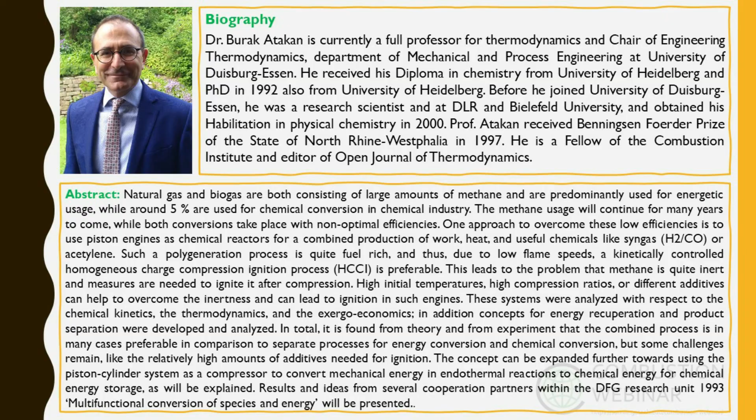And it's not only about my own work, but also about the work of our DFG research unit. I will introduce the work of the colleagues as we come to their work. Let's start with a few things you already know, I assume.

I think we all know that we have some problems with fossil fuels: they are rare, and they lead to carbon dioxide emissions, and we have problems with climate change. We'd like to reduce these carbon dioxide emissions. Due to this, not only in Germany but worldwide, we are going towards solar and wind energy, with the well-known problems that they are not aligned to the demand. Due to this, flexible energy conversion is getting more and more important. At the same time, we have quite some demand for energy storage, mainly with high energy density.

If you regard a slide where you look at the time you can store energy and the power you can get out, you would end up generally with chemical compounds if you want to store energy, like synthetic fuels, biomass, hydrogen, hydrocarbons, ammonia, but also hydroelectric. On the other side, it seems quite clear that natural gas will be used for quite a while, at least in the midterm, according to the German academies. They say we will continue using it until the carbon dioxide reduction gets higher than approximately 80%.

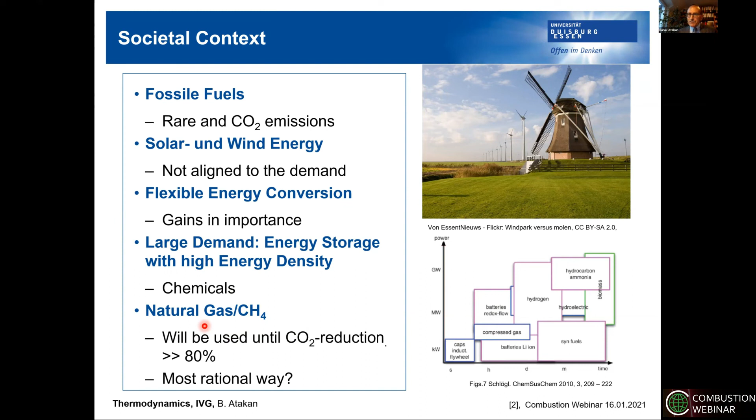Due to this, we started thinking together with several colleagues from thermodynamics, mainly thermodynamics professors. We were sitting together thinking, okay, what kind of solutions could we find, for example, to help in the energy transition? We're thinking about the usage of natural gas. Can we do this perhaps in a more rational way?

One of the things, if you regard methane usage or natural gas usage nowadays, is that around 95% is used for energy conversion, while the remaining 5% is used in chemical industry, generally first to produce syngas. Out of syngas you can make methanol, dimethyl ethers, or end up with ethylene and then some polymers. The question is, could we have processes where we produce both those together, some work output and some chemicals output, and perhaps also some heat output? Could we have some holistic conversion of species and energy?

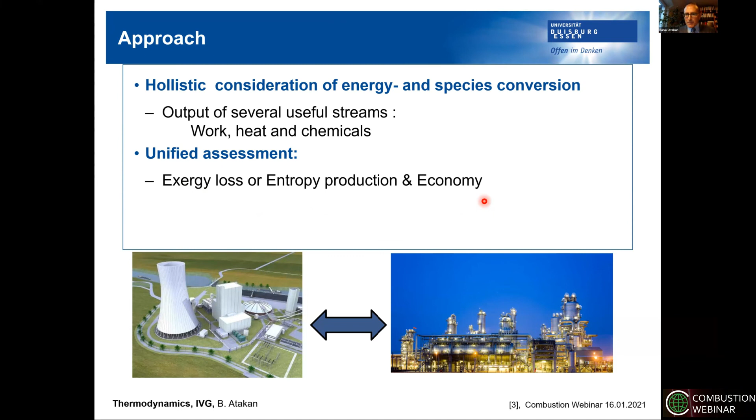Somehow we have to assess it, because the main question is also, is it really better than two separate processes? For this, coming from thermodynamics, one of the things is we can look for entropy production, try to reduce it as far as possible, or in other words, reduce the exergy losses. On the other side, we could also look for some economic assessment: will the prices perhaps be lower than in two separate processes? Since we're coming from combustion, first of all, let's look at methane conversion.

If we start reducing the amount of oxygen added, we can, for example, go to an equivalence ratio of 2, so the amount of oxygen is only half as much as you would need for stoichiometric combustion. Then you would end up with synthesis gas and some water. But what's more important at the moment is you also have some negative Gibbs energy, which is quite high. In principle, you could do some partial oxidation, producing syngas, and at the same time also have some work output. This is generally not used—you can call it wasted.

Similarly, you can continue reducing the oxygen further towards an equivalence ratio of 4, and you can get even more hydrogen out. Surely the possibility to transfer some work will be reduced, but it's not zero, and it may be reasonable to have some work output. So this would be a polygeneration process with at least 2 or even 3 products, if we also have some heat which is transferred.

If you go further, you can leave out the oxygen and think about some endergonic and endothermal reactions, for example towards acetylene and hydrogen, or benzene and hydrogen. For this you would have to add some work, and this would be a typical process where one could think about storing energy. You could add 156 kilojoules, if it were reversible, to produce acetylene and hydrogen, either use it directly here in chemical industry, or if you don't want to use it there, at least you could burn it again and you would have a higher heating value.

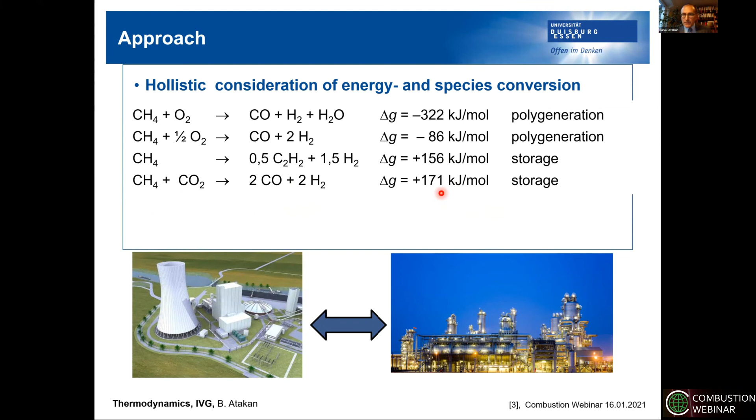This is one process mainly investigated by Olaf Deutschmann and his colleagues. We could also go for dry reforming, where we convert carbon dioxide with methane towards syngas. Again we could store energy because the Gibbs energy is highly positive, and again we could think about whether we could perform it with what we know from combustion.

With respect to exergy, I always include this slide because at least the chemists in the combustion community normally don't know much about it. Exergy is just the available part of the energy, and it depends on the actual state of a system and on the environment. It's mainly how much energy is convertible into any other form of energy if you bring it into equilibrium reversibly with the environment. Exergy can be lost or destructed due to irreversible reactions, due to heat losses, or due to mixing. It can easily be calculated from thermodynamics, just looking at the irreversible entropy production and the temperature of the surrounding.

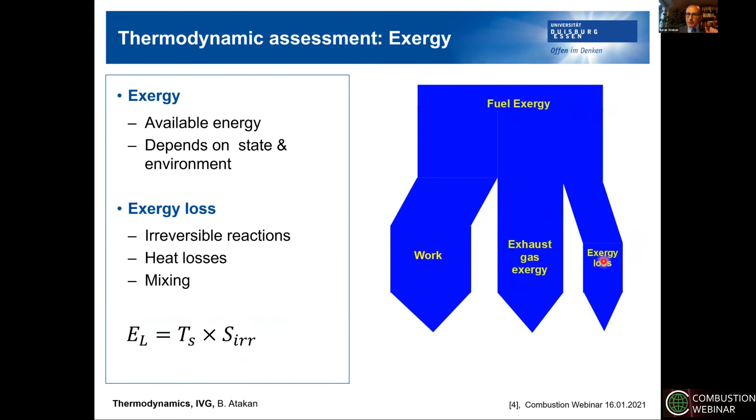The main idea is that we have lots of available energy in our fuel or in our precursor, and we want to transfer as much as possible to work, or to the exergy of our useful products, which would normally be in the exhaust gases. We want to reduce the exergy losses as far as possible.

In principle, these kinds of polygeneration processes were already investigated by several groups, but generally, as shown here from one paper, they are combining 2 well-known processes. For example, here some iron production process is used where you add some iron ore and coal and end up with some hot iron. But since you're producing carbon monoxide, you can use this again, for example in a combined cycle, and produce heat and electricity together with the metal. You will also have to add some natural gas in addition to the carbon monoxide, while the processes remain unchanged.

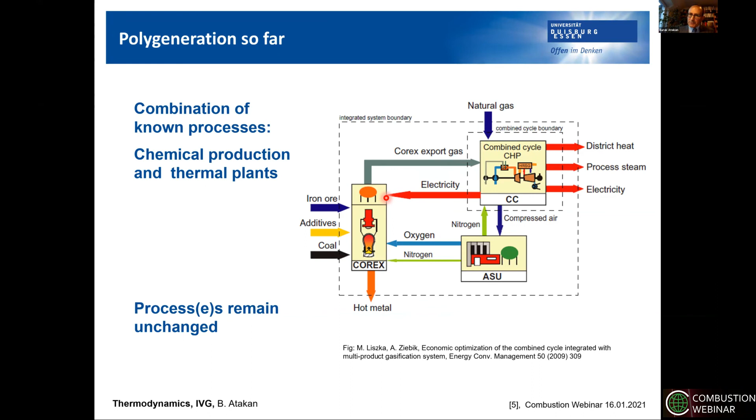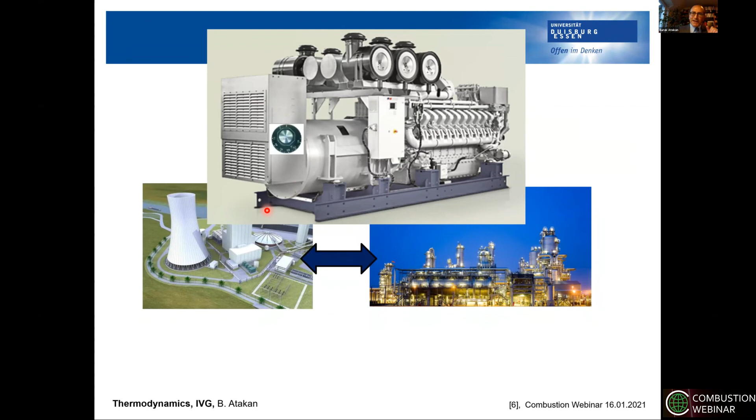In our case, we want to look into the process and have one single process which is modified, and we want to use them for polygeneration. Since we're coming from combustion, we ended up putting those 2 things together into a single engine.

Generally, you will be asking yourself, why an engine? My first paper about this topic was about gas turbines, but they are quite expensive, and nobody wanted to give me his gas turbine for doing experiments under very fuel-rich conditions. Instead, with engines, we know at least that they are industrially approved and relatively cheap.

If you have the HCCI process, meaning you have a homogeneous charge, so a pre-mixed mixture, and you ignite it due to compression, you have a mainly kinetically controlled process. Generally there are also always some questions why HCCI - I'll come back to that in a minute. The other thing is we don't only have the compression where we heat it up, but we also have the expansion directly after. If the product would tend to react further, you can stop them due to cooling in the expansion. That's again, at least sometimes, quite helpful.

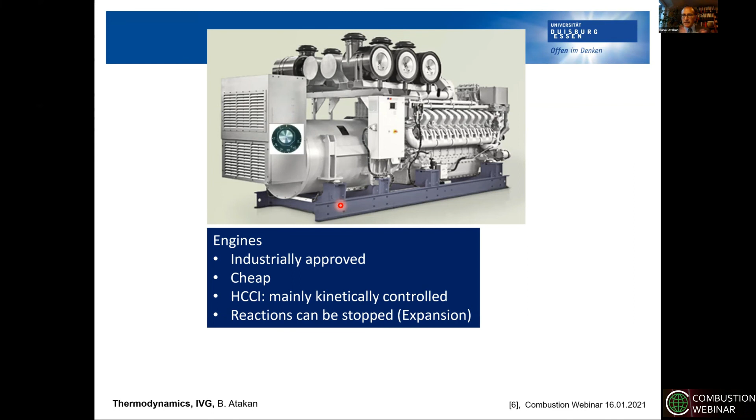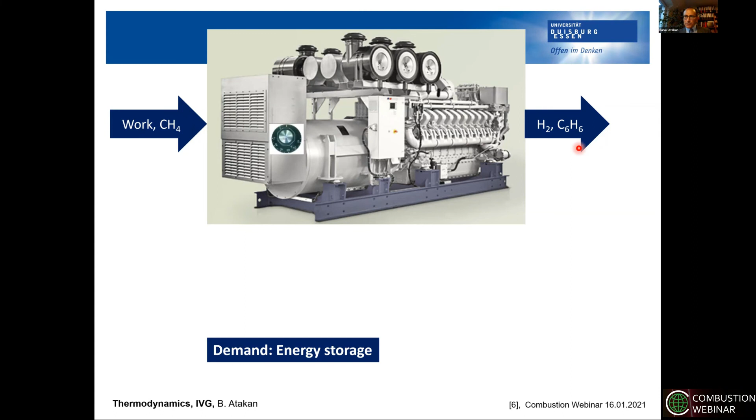The idea is for flexible energy conversion we may have such a knob, and we can choose: for example, if the demand is energy storage, we could add work and methane or natural gas and end up with hydrogen, benzene, acetylene, and whatever comes out. Or if the demand is changing, we would need electrical energy and chemicals, so we'd add oxygen instead of work and end up with work output and syngas. But we have problems with natural gas or methane because it's relatively inert.

Due to this, we often need an additive to help ignite this mixture. For example, things like DME, dimethyl ether, are used, which isn't really wanted because you're producing dimethyl ether out of syngas, so you don't want to add too much of it. Recently, we're also looking at things like ozone, which can help with ignition.

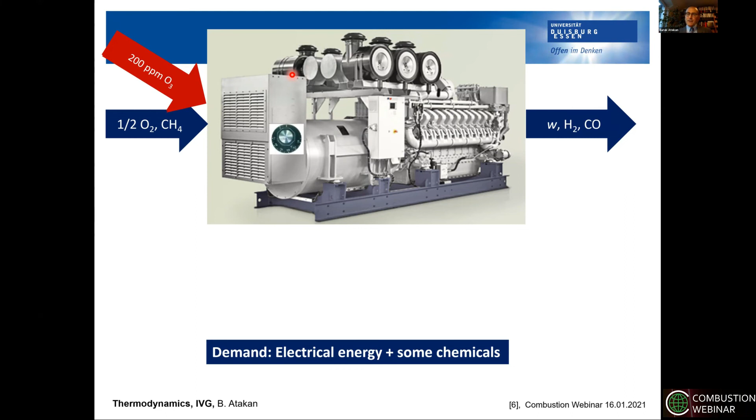Our approach is to use engines directly for the conversion of species and energy, using the knowledge of the combustion community. We want to go along high temperature paths, so we won't be able to produce things that are very unstable at high temperatures. But we also want to use all the mechanisms developed within the combustion community to reduce the amount of pollutants.

Our aim is not to reduce pollutants — something like carbon monoxide would normally be a pollutant. Instead, we want to maximize them using these mechanisms and other techniques learned in combustion. So we want to go away from pollutants towards useful chemicals and investigate the fundamentals of such processes.

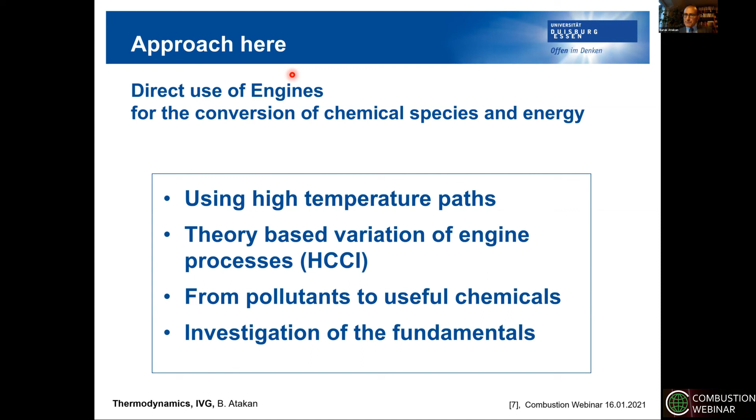With respect to the engine process, I often get the question: why don't you want to use spark ignition? Why do you want to use HCCI processes? Because many of you know that HCCI processes are difficult to control, mainly in the lean regime.

But you should keep in mind that we generally have to go to quite fuel-rich conditions. And if you want to ignite with spark ignition, the flame propagation depends on the turbulent flame speed, which in turn depends on the laminar flame speed, and this drops strongly as you go towards high equivalence ratios.

So due to this, with HCCI we think, and we've also proved, that it works better. I'll show you a few slides about that.

So in total, the HCCI process is more or less an Otto cycle. If we start at bottom dead center, we have the compression, then a more or less isochoric ignition, then the adiabatic expansion, and then you would have the exhausting afterwards.

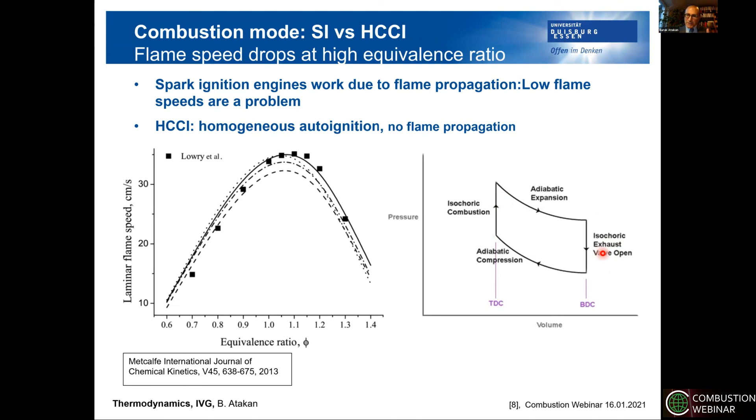And therefore, for the exhaust, we're interested in using what's coming out there at that point. Our main goals here are to answer questions such as: are high yields and high selectivities possible in engines towards synthesis gas, but perhaps also towards unsaturated or partially oxidized hydrocarbons?

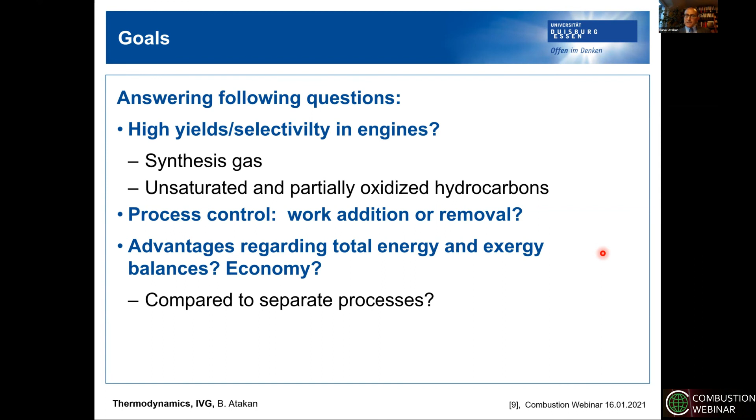Is it easily possible to control such a process so that you either add work or remove work depending on the needs? And also — perhaps the crucial question — are there any advantages compared to separate processes with respect to total energy and exergy balances, or with respect to the economy?

With respect to piston engines, one should keep in mind that it also leads to several couplings which one has to care about. First, if we just look at the energy balance, the amount of work transferred is just the amount of change in internal energy and the heat transferred.

Let's think about some adiabatic compression. Then it's clear the final temperature depends on the compression ratio and can be calculated according to this formula if Cp were constant. But here are some calculations with non-constant Cp.

What's important is if we increase the compression ratio for different mixtures — pure methane, methane with oxygen 1:1, or methane with air — you see the temperature rise isn't bad, but if you regard the ignition temperatures, around 1300 K, wanting ignition in the millisecond regime, we're far from it. With oxygen it's getting better, with air even better, but keep in mind these are compression ratios of 40, while something like 20 would be more realistic.

While if we start heating the mixture first, a little bit towards 450 K, things look much better, but not perfectly good. So there's something to be done about that, to really end up with some ignition.

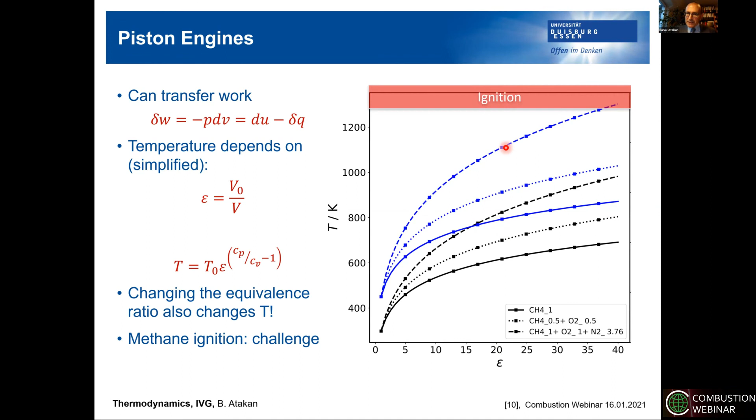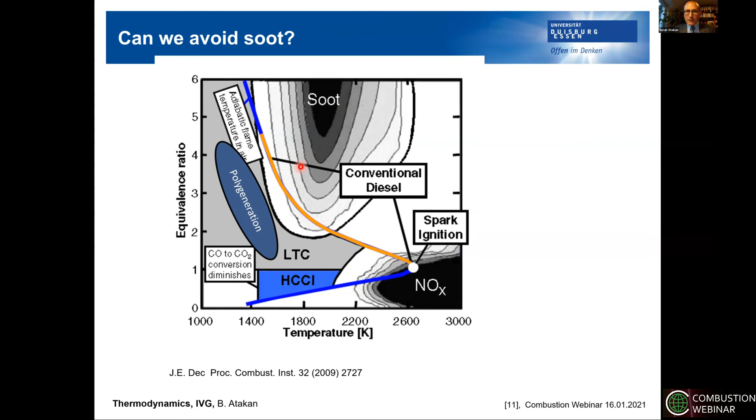And so we went through a procedure. We are running this project now for 8 years with 8 projects. First of all, we have some a priori evaluation: is the thermodynamics favorable in principle? Is the predicted kinetics fast enough to have such a process in the engine, using non-validated mechanisms? And what could be probably favorable conditions, before we start doing experiments with respect to the kinetics, using shock tubes, rapid compression machines, or flow reactors, and later on also in engines.

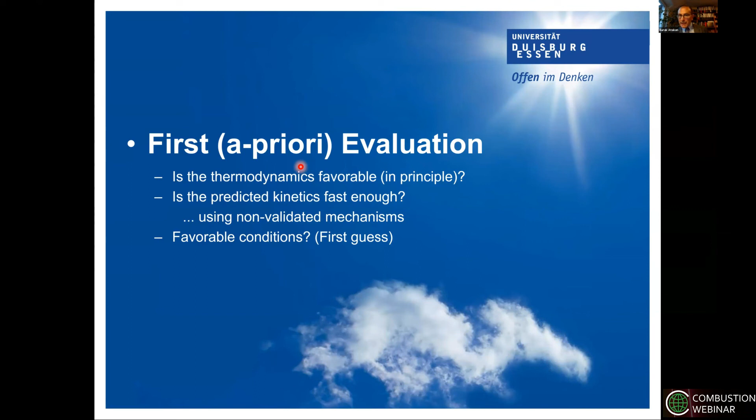A good idea is to start with something relatively simple, and a single zone model with detailed kinetics is a good starting point, including some heat transfer using the Woschni equation. We use a reaction mechanism which is already established; you will find the reference here. We start with some initial conditions, and then go along the crank angles or along the changes in volume, calculating with the kinetics and thermodynamics the changes in temperature, pressure, and composition. We do this time step by time step, as many of you will know.

And then at a certain point, we get ignition, but we are mainly interested first of all in integration of the work, but we want to know also what's coming out at the end with respect to the product gases, with respect to Exergy and the work output.

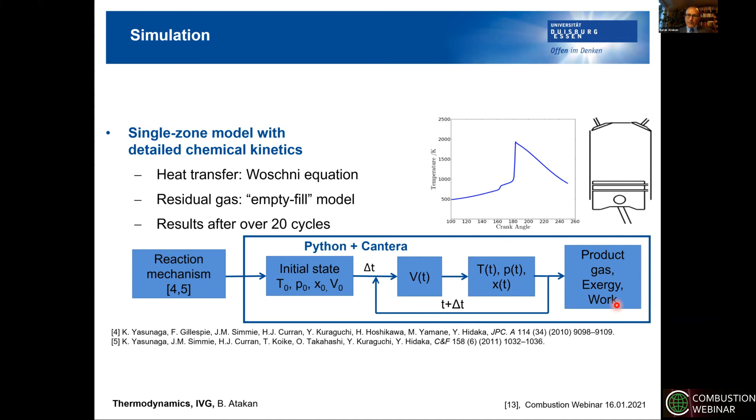If we have just a typical cycle, this was calculated by Dominik Schröder, who changed his name to Freund now, and by Robert Hegner, at equivalence ratios of 2, a relatively low engine speed, compression ratio of 18, and 428 K. It's already the 10th cycle, because it always helps to have some residual gas at higher temperatures for the ignition in the next cycle.

And after a while, you will end up with a steady state process. If you now regard the products here after ignition, you see that we end up with reasonable amounts of hydrogen, something like 18%, or carbon monoxide, something around 13–14%, in the exhaust gases. Ethylene or acetylene are only produced around the ignition under these conditions, but afterwards they are reduced near to zero.

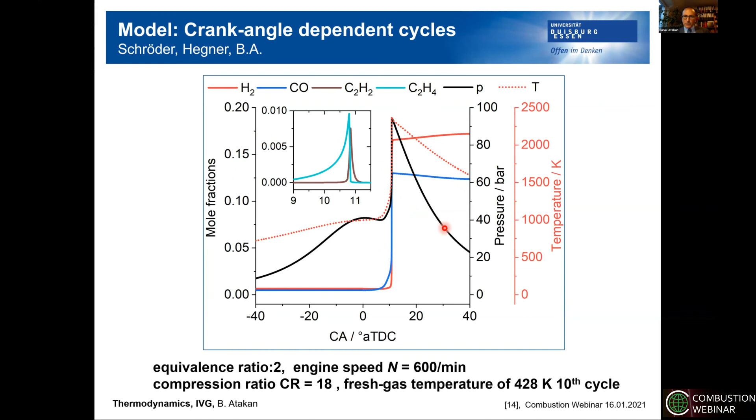Now, the main point for the initial investigation was also how can we reduce the intake temperatures, because our experimentalists did not want to have higher temperatures than around 150–160 centigrade approximately. If you look for an engine with a compression ratio of 16.5 and a speed of 3,000 per minute, having neat methane, you see that we'll need quite high intake temperatures for ignition if we go for high equivalence ratios. You can reduce it, for example, by increasing the compression ratio. That helps a lot. What also helps is reducing the engine speed, or what's perhaps best, mainly under very fuel-rich conditions, is adding an additive like dimethyl ether, something like 5 up to 10% seemed to be reasonable.

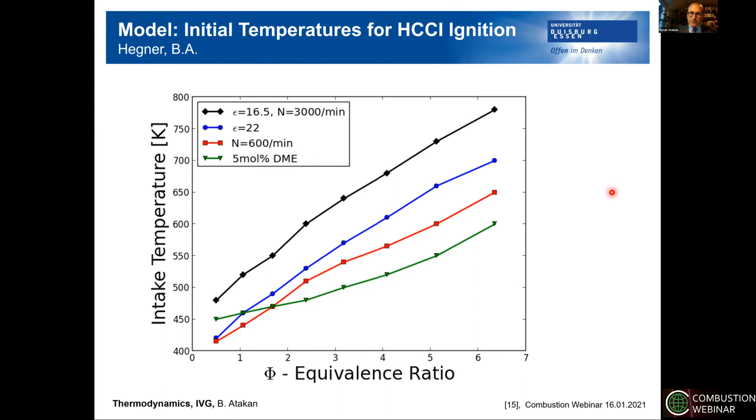And this was also one approach we were using afterwards. What is predicted, at least from the modeling, what should be coming out? At equivalence ratios around 2 to 2.5, we should have lots of hydrogen coming out, lots of carbon monoxide coming out, so synthesis gas. We can also change the ratio between both, which is sometimes quite important. While if you want to go for acetylene or ethylene production, you will have to go to very fuel-rich conditions. And surely the amount is not too high, but you should also keep in mind that we are doing all these things with air as the oxidant, so we have relatively high amounts of nitrogen in the mixture.

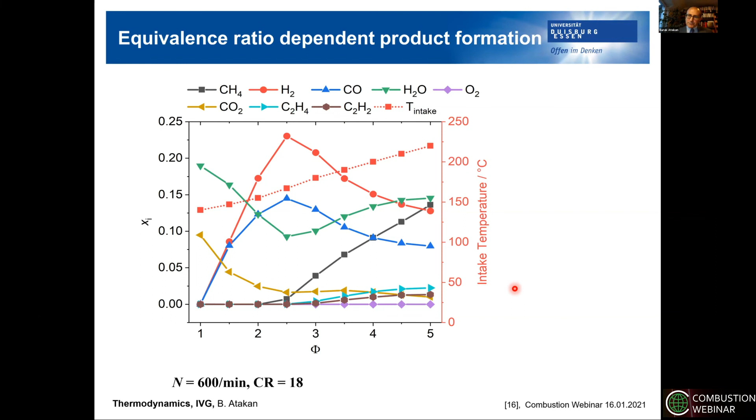But since it's quite tedious to do all these by some guessing what may be good conditions, we have colleagues, mainly Olaf Deutschmann and Hendrik Gossler, who do this with mathematical optimization. In these calculations, they went for an optimization of ethylene. For each temperature, they had one optimization restricting the amount of DME and the engine speed to some maximum values. As you see here, if the intake temperature is not too high, you would have to add around 10% dimethyl ether — this was their limit. While at the higher temperatures, you would go for higher engine speeds.

What's perhaps most interesting is how much ethylene is predicted, and you see something between 15 and more than 20% seems to be possible. The equivalence ratios, which are also optimized, would then be somewhere between 3 and 4, which is a dangerous regime with respect to soot formation, to be honest.

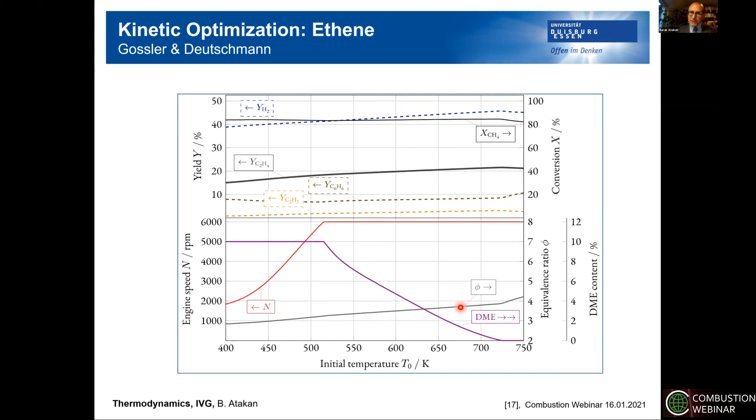Okay, this is about the first evaluation. The next thing is we should validate these things in experiments, because most of the models we're using initially were not really validated too much for these kind of conditions.

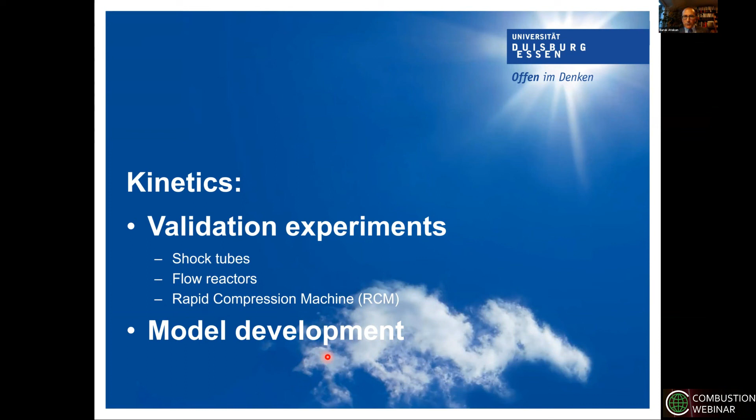So we have different experiments using shock tubes in the group of Mustafa Fikri and Christoph Schulz. We have flow reactors, mainly Tina Kasper is working on this together with myself. And we have a rapid compression machine, which is more or less the first step towards the engine, done by Robert Schiesel and Ulrich Maas. At the end, we also developed a relatively small model, again, in the group of Ulrich Maas.

If you look for a few exemplary results from the shock tube, where you can have relatively high temperatures at small time scales, but also relatively high pressures, you see that the ignition delay times can be shifted from neat methane, this curve here, by adding different additives. Here you see DMM, dimethyl ether, diethyl ether, or N-heptane as additives.

And it doesn't really matter which of those additives you're using. If you want to end up, let's say, with 1 millisecond of ignition delay time, or 1 or 2 milliseconds, then you have a shift of around 150 to 200 K, with nearly any of those additives added at 5 to 2%.

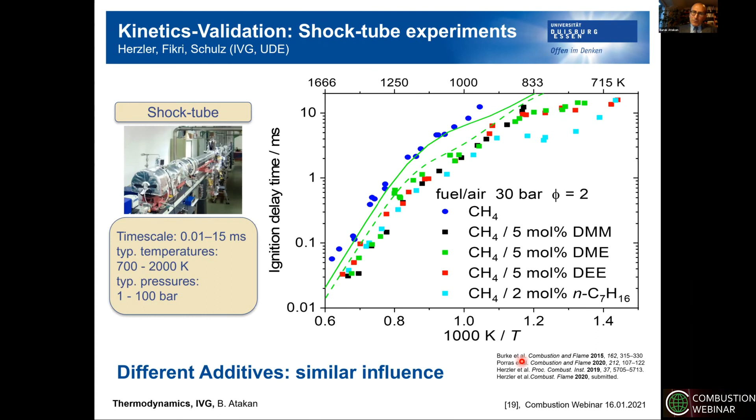With respect to the mechanisms, I should admit that this was the Polymec mechanism coming from Ulrich Maas and Silvia Porras, which is at that point slightly worse for this calculation for DME, compared to the Burke mechanism. But nevertheless, at least additives seem to be helpful.

Another question we got quite often, or we get quite often, is in natural gas there is also ethane and propane. Couldn't this help already? So perhaps we don't need any other additive.

Some of the experiments were done by Dennis Kaczmarek together with Tina Kasper in a simple plug flow reactor. Here you're mainly seeing the insulation. In the middle of it, there's just a quartz tube. And at the end, we normally have some mass spectrometer or some gas chromatograph for the analysis.

The time scales are now much larger, something like 10 seconds. The temperatures are lower. Now we can go up to 1400 K, but these are in the old reactor with 970 K, and pressures could go up to 20 bar here.

Since we are only looking at the final products, the main question is at which temperature is methane really converted? For neat methane, it's somewhere around 800 K, while if you have ethane and propane added in total by 10%, you see that it helps a little bit, but not too much.

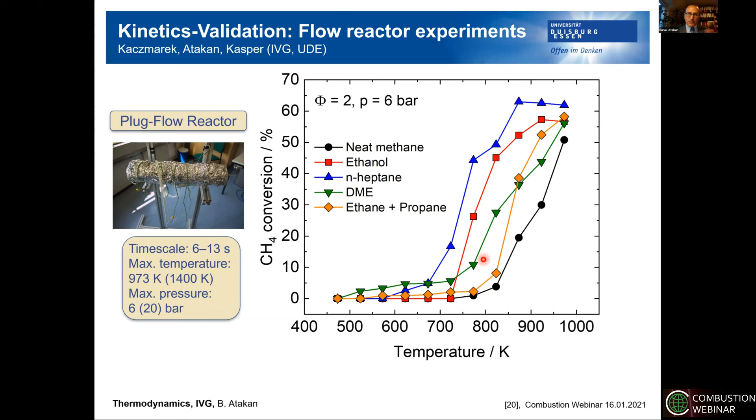While, for example, for N-heptane, we can even start at around 700 K, and for dimethyl ether, it's quite similar, starting much earlier. So again, we are going towards such additives like dimethyl ether or N-heptane.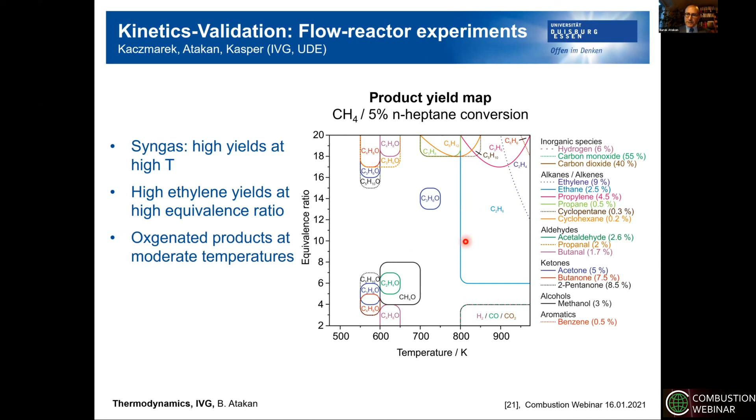Another question we also get quite often is, can we really end up with reasonable amounts of ethylene also in some engine-like process? And we looked for this in a rapid compression machine. This was mainly done by Mark Werler, Robert Schießl, and Ulrich Maas.

Here you see experiments for quite different equivalence ratios between 1 and 15. For example, for ethylene, you see that at least at equivalence ratios of 6 to 7, you can end up in a non-optimized process with around 2% yield of ethylene.

So at least for a non-optimized system, it doesn't look too bad, but under some of these conditions, we always have the danger of soot formation.

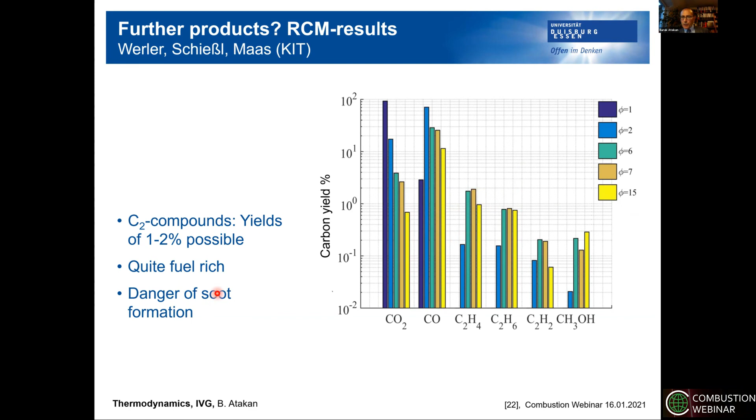Okay, then the next step is going towards engine experiments, because in real engines, several things are more difficult than in our nice kinetics experiments. This is mainly done by Sebastian Kaiser and Kai Banke, and earlier by Sebastian Wiemann.

It's an engine with a quite simple scheme here. I won't go through all the details, but we have the pressure measurement inside. We can go for intake temperatures of 150 to 160 centigrade. Initially, the compression ratio was restricted to 10, now we can go for 20. Most of the experiments were done at relatively low engine speed, and the displacement volume is 0.3 liter. At the end, we have some exhaust gas analyzer and some smoke meter.

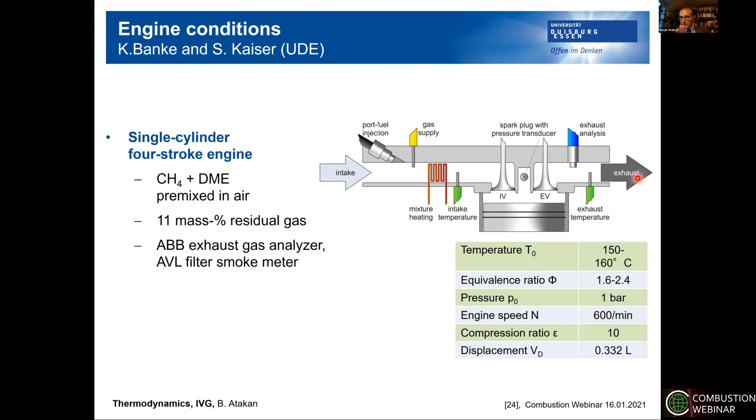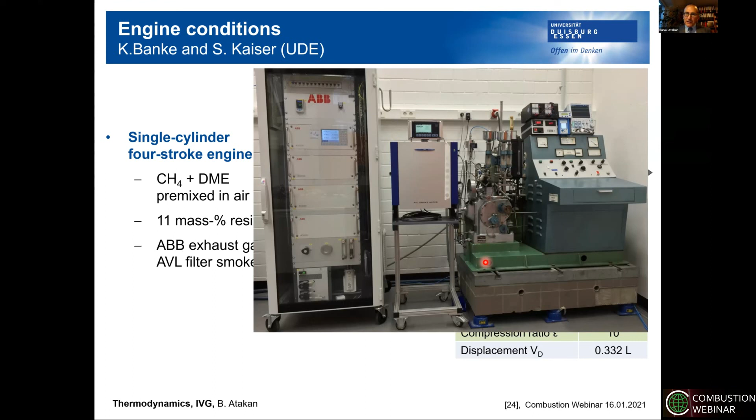You should also keep in mind that the laboratory equipment has to be changed a little bit, because our exhaust gases, when mixed with air, are ignitable again. So one has to take care about that. If you look at the engine, it doesn't look too modern, but nevertheless it's quite robust. Here's also the gas analytics. This was the engine used most of the time, called a BASF octane engine.

In the very first experiments, we started with spark ignition because we already had the setup for it, and we also did the one-zone modeling. You see all the co-authors at the top. The experiments were done by Kai Banke in the group of Sebastian Kaiser. What you see here is we are comparing the experimental results with the modeling.

The main parameter is the equivalence ratio. If equivalence ratio is 1, we end up with carbon dioxide mainly, while hydrogen and carbon monoxide are mainly produced if you go to higher equivalence ratios. But starting at an equivalence ratio of 1.5, we get more and more misfires, while the model doesn't care about that. We model the spark by some OH addition at top dead center, while in the engine you see that you don't get much output on average.

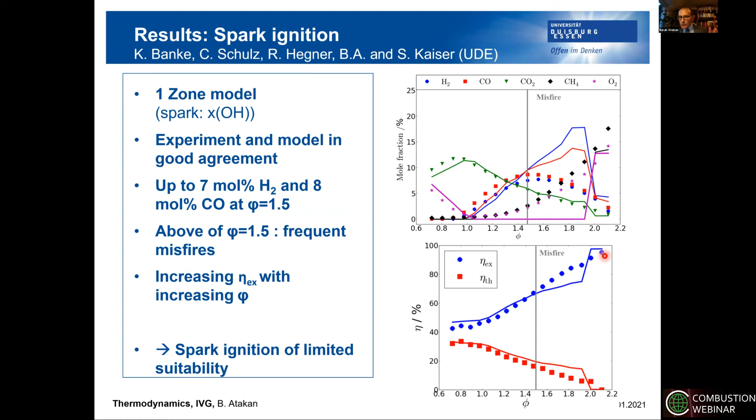If you now look at the efficiencies, the exergetic efficiency and the thermal efficiency, surely thermal efficiency drops because the more fuel rich you get, the less you convert towards carbon dioxide. While if you look at the exergetic efficiency, you have lots of the exergy in the products together with the work output, so at that point we can increase the efficiency from around 40% to more than 60%. But these points are misleading, because if you don't have ignition, you end up doing nothing. If you conserve your methane, surely you don't produce any entropy, but this isn't really what you want. So even if you conserve all the exergy in your fuel, this may be misleading at that point.

Then the colleagues did lots of nice experiments, now not only in SI mode but also in HCCI mode with dimethyl ether or diethyl ether added. Here you see the regime of equivalence ratios from 0.5 going up to around 12. There are lots of data, I won't go through all of them, but what you see is with HCCI we can easily end up with syngas, for example at equivalence ratios around 2 with quite high amounts.

But we also have to care about soot. You see the amount of soot is also increasing here, so you have to find a compromise if you don't want too much sooting. The next problem we also have to care about - I'll come back to this in the next slide - is that under certain conditions we have a problem with how often we get misfires. So this coefficient of variance is one parameter which should not be too high.

Regarding the exergetic efficiencies, you see that we can go up to 80% here with DME, and even slightly higher with diethyl ether. The nice thing about these diethyl ether experiments, which are at very high equivalence ratios, is that the amount of soot is reduced quite strongly. So if you go for very high equivalence ratios, this helps.

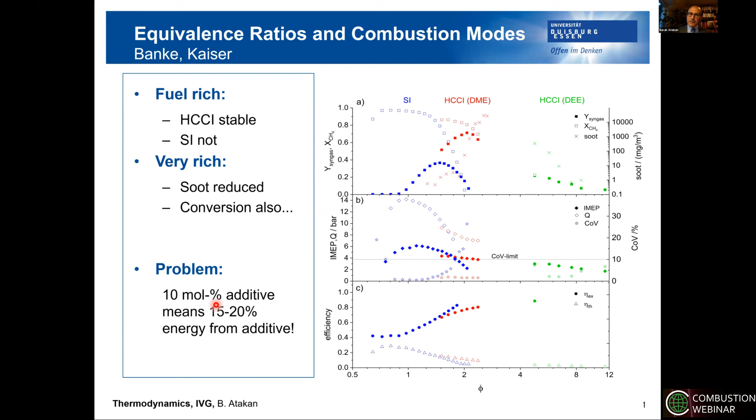One part of our research is now going in the direction to avoid at least these ethers as additives. But let's also go through the other things we learn from doing such engine experiments.

For example, Kai Banke always uses these kinds of experiments where he adds more and more dimethyl ether while holding all the other gas flows constant, here for an equivalence ratio of 1.75. What he sees initially is the coefficient of variance, shown on the right-hand axis, is quite high initially, meaning you have lots of misfires.

While it's reduced in this experiment at dimethyl ether mole fractions between 9 and 10%, relative to methane, if you add further dimethyl ether towards 11%, the pressure rise rate gets quite high. This is a problem also known from lean HCCI processes. The pressure rise rate shouldn't be too high because you're in danger of destroying your engine. So in the middle we have a window where we can run this process nicely, but we should neither have too small amounts of dimethyl ether nor too high amounts, in order to have a stable process.

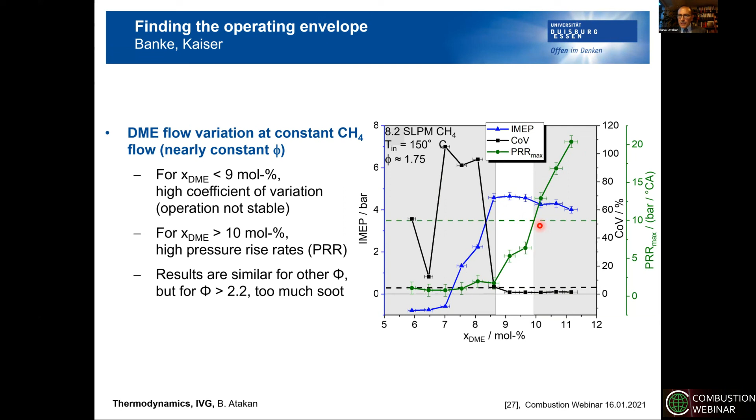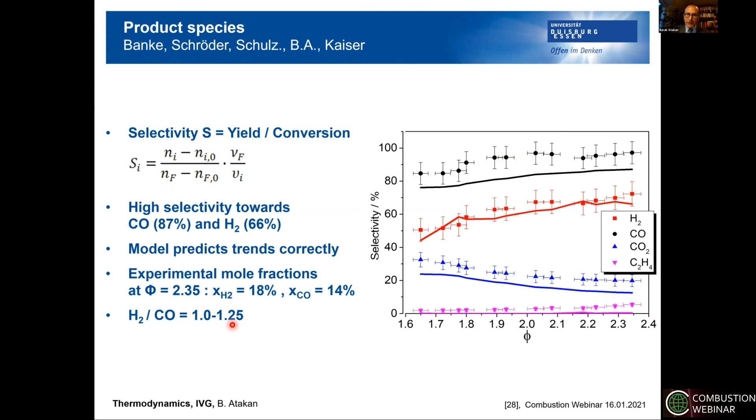If you then regard the selectivities, comparing experiment and our single zone model, we also have multi-zone model results, but these are much slower. They are in reasonably good agreement, so we can make lots of predictions also with such relatively simple models, and the amounts of hydrogen and carbon monoxide are relatively good. We can also vary the ratio of hydrogen to carbon monoxide, which is also interesting sometimes.

With respect to the exergetic efficiencies, as I already told you, we can go up to 80%, while the thermal efficiencies are not very high, around 10%. But nevertheless, around 10% of the energy is converted to work, while the remaining part is found in the chemicals or as heat.

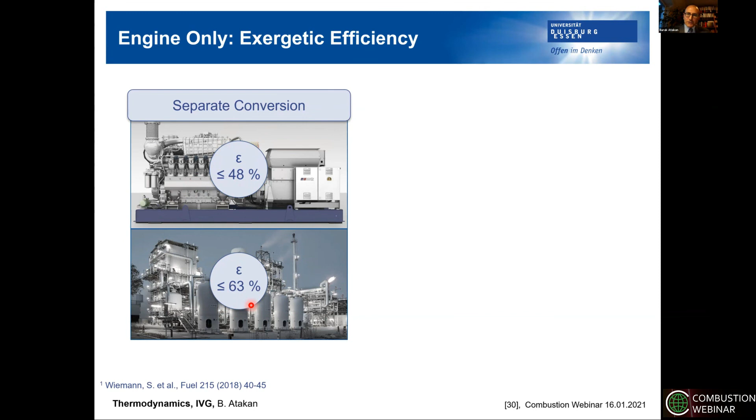So now if we compare with separate conversions, from the literature we found the best HCCI process has an exergetic efficiency of about 48%, only towards work, while the best syngas production process ends up with 63% exergetic efficiency from the literature, while what we found here is something like 80%. So it seems to be promising at least.

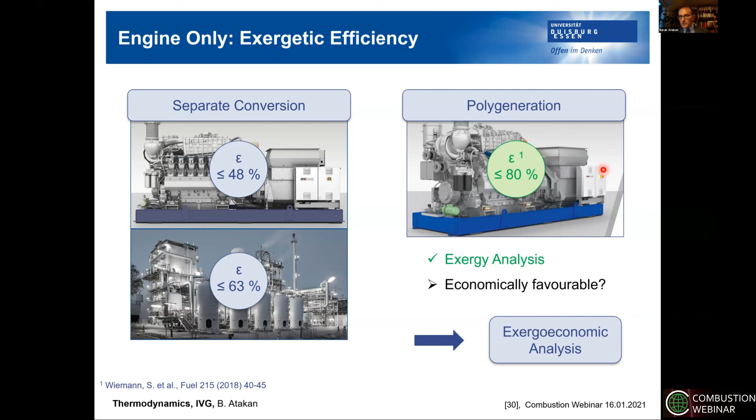But the next question is: is it also economically favorable? We are not yet finished, because here we end up with a mixture of different gases, and we also have to think about how much it costs us in terms of exergy to separate those gases. Due to this, we went for a process for hydrogen production together with work and heat, and also assessed the separation together, and then the economic assessment.

So we end up, in theory—it's only a modeling study—with a process where we start with methane and air, have our engine or single zone engine model, with a preheating stage. Then we have some exhaust gas recirculation, which is varied later on. The carbon monoxide is converted in a water gas shift reaction towards hydrogen, and then we have a membrane in our model made out of palladium, which is quite expensive. Then the hydrogen is separated, and we also need some pumps or compressors to end up with a reasonable pressure of the hydrogen.

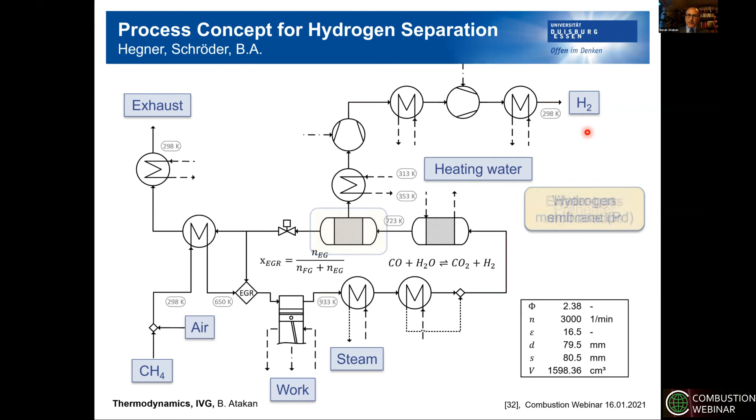If we go through such a process, we have to analyze each part with respect to the economics. So we have exergy flow rates for each compound, comparing how much cost rates are getting into a process from the fuel, how much are getting out, and what's the difference for the products.

How much do I need for the investments, for operation and maintenance? And how much does it cost us to destroy exergy or to lose exergy? For this, we have these cost rates—each exergy flow rate has to be multiplied with the cost per exergy, giving us the cost rates.

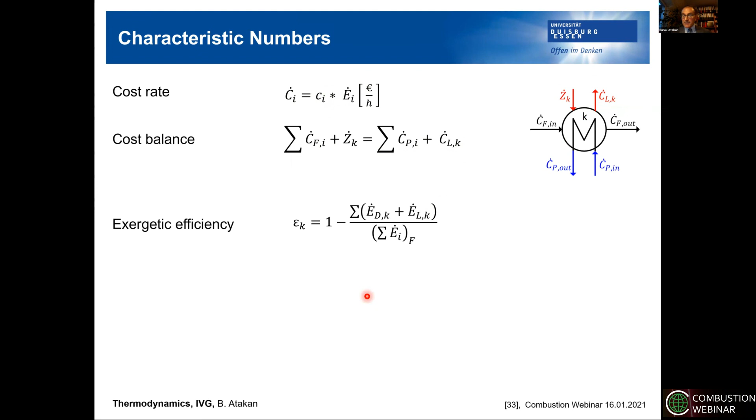Then we have a cost balance for such a system, comparing the difference in the cost of fuels and the investments with those of the products, losses, and destruction. We compare the exergetic efficiency, how much is lost compared to the exergy initially provided. And the exergo-economic factor is perhaps also quite interesting.

It compares how much the investments and investment costs contribute to the costs, and how much of the total costs result from investments versus from the destruction of exergy. So if this factor is around 1, you should look for processes which are cheaper with respect to investment. If it's near 0, you should look for thermodynamically more favorable processes.

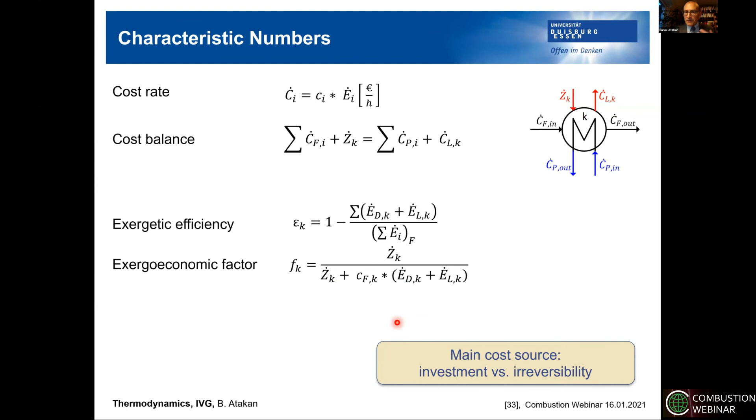I will not go through this one. So let's look for the

Product cost rates of hydrogen, but also of electricity, steam and water. What we're seeing here is if the exhaust gas recirculation ratio is not too high, then we have relatively high product cost rates for the hydrogen. Perhaps most interesting, 67 to 80% of the costs are coming from the hydrogen, meaning 30 to 20% are coming from electricity and heat. So it's worth also looking at those two while looking at the hydrogen, since 20 to 30% of the costs are coming from the other products.

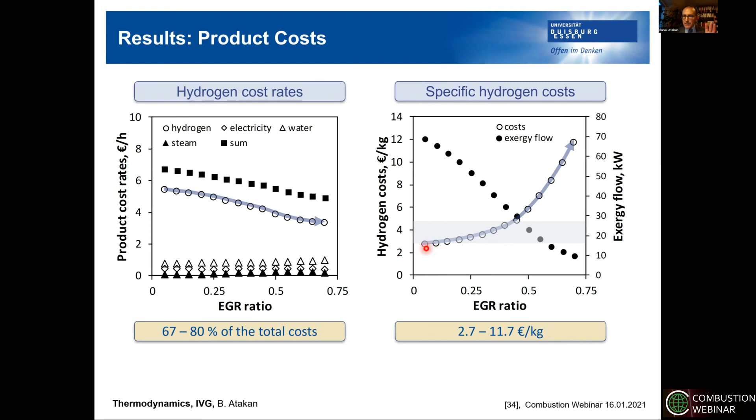If you look at the hydrogen costs per kilogram, this is our typical market price we could find, so we can compare our process here. If the exhaust gas recirculation ratio is not too high, then we are at the lower limit, and it seems quite reasonable to have such a process. So it's competitive.

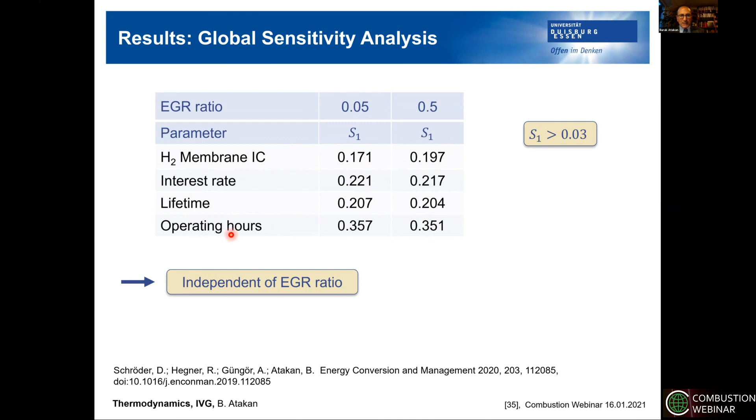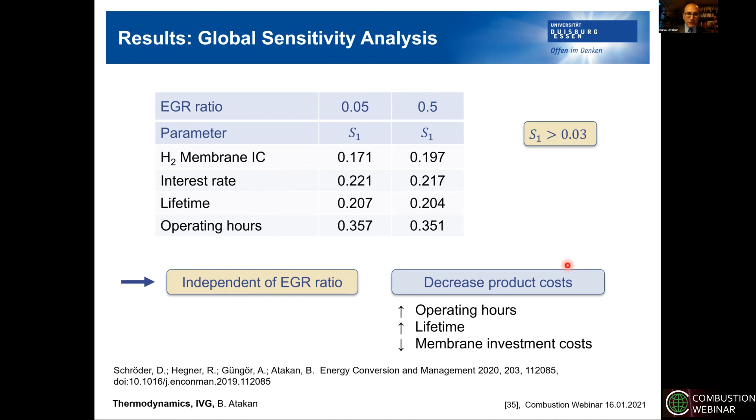So it may be reasonable to look for hydrogen separation processes which don't use as expensive membranes as we were looking at. This work was done together with Ali Güngör from Ege University in Turkey. The total exergetic efficiency, including all separation processes, dropped from 80% to 60%, but nevertheless it's looking quite promising at the end.

If you look now at the exergy destruction rate, the engine is the most important one, unfortunately, while the others are not as important, like the water gas shift reactor or the hydrogen membrane. With respect to the exergetic efficiency, the water gas shift reactor has a relatively low efficiency, but it's not as important at the end, while the exergetic efficiency of the engine is again relatively high.

So these things are looking quite good. With respect to the exergo-economic factor I introduced before, we see that for most of them it's worth looking for processes where the investments are lower. So for example, scaling towards larger engines should help at that point.

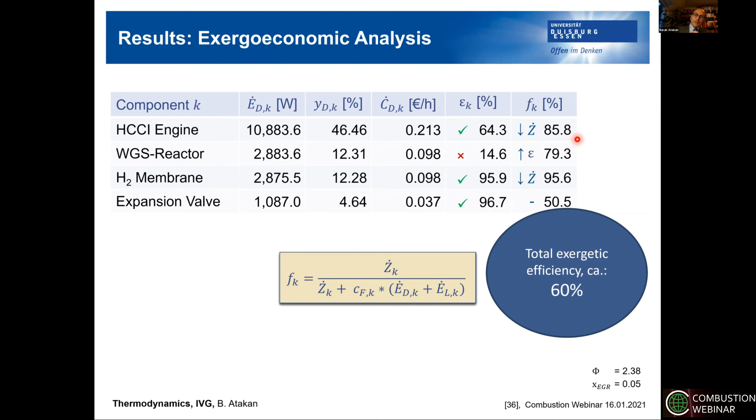But first let's look at some engine results. Kai Banke was doing experiments where he was replacing DME with ozone. By adding, for example, 70 ppm ozone and increasing the inlet temperature, he could reduce the addition of DME towards zero, and even reduce the addition of ozone towards zero if going for high enough temperature. So we could get rid of all the additives if we go for high temperatures at high compression ratios, here 18.5.

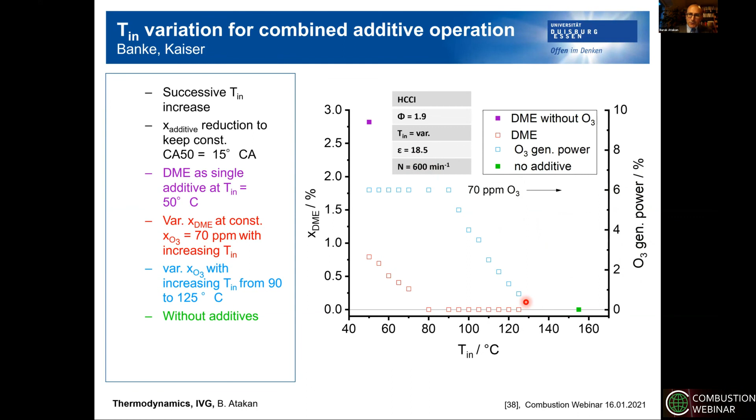But in general, engine people are quite happy if they have something like ozone for controlling the process. If you look now at the amount of power needed compared to the power converted in the engine, we need around 6% of the power initially, and this is reduced towards 0% if we don't add any ozone. We also modeled this, and here are the experiments of how much ozone is needed to replace DME - so if you go to lower DME, you need more ozone. This is what we modeled with the Burke mechanism, which is not optimized for these conditions, so it's not perfectly fair, while the PolyMech did a slightly better job here.

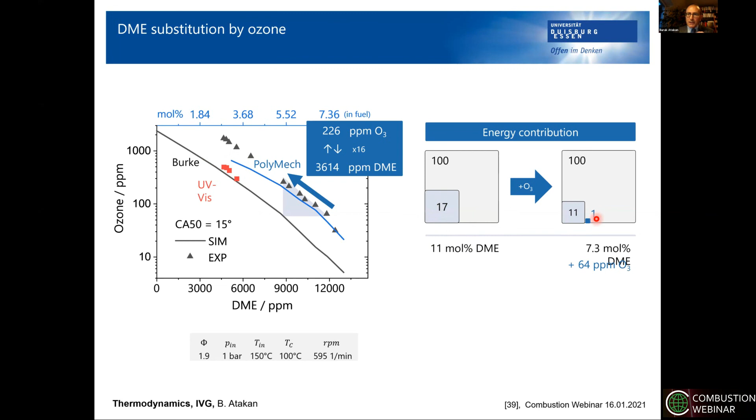While we are not exactly sure about the experiments, because we also saw that some of the ozone may be destroyed in the entrance tract of the engine, due to this, perhaps even we have to reduce those values. But nevertheless, we can reduce the DME amount quite reasonably, and for this single condition, for example, reduce the amount of energy added from 17 to around 11%.

Perhaps on one slide, you may see more of this at the combustion symposium.

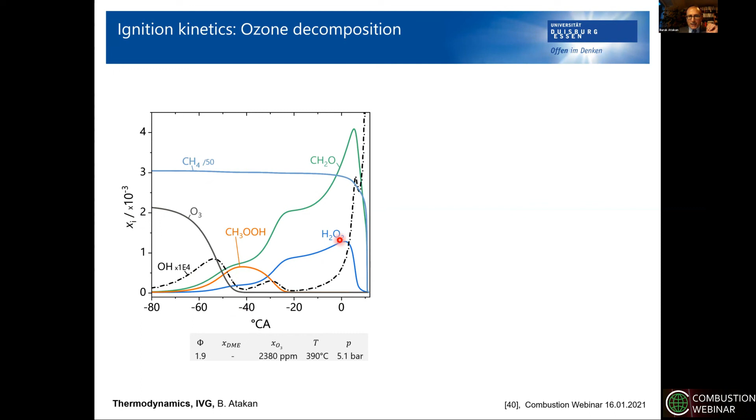How does ozone help us at that point? If you look at the conversion of methane, you see that ozone is destroyed much earlier in the engine, so there's no ozone left when the methane is mainly reacting. What's happening is that OH is also reacting quite fast, while there are several buffer molecules, and one of the most important is methyl hydroperoxide, which is produced in between. Then after this, hydrogen peroxide and formaldehyde are produced, and these really help for the ignition at the end.

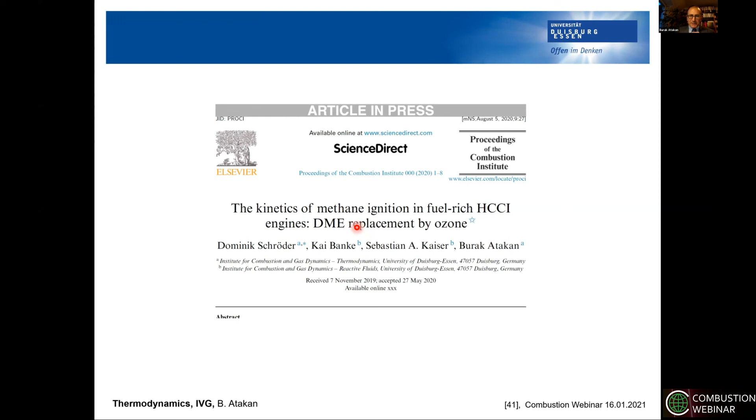Okay, now, we present this at the upcoming combustion symposium, so if you want to hear more about this, also about the flow analysis and these kinds of things, just have a look at this talk.

Another topic I will not come to today is about energy storage, because we can also add energy and convert things like methane or methane-ethane mixtures. This is mainly the work of Charlotte Rudolph.

How about scaling such an engine process to industrial scales? Is this realistic? If you look at normal syngas production in industry, they produce around 100,000 cubic meters per hour of syngas under standard conditions. If we now do some rough estimation with a 100-liter engine, meaning the displacement volume, as used for cogeneration, and extrapolate from our work with a much tinier engine, we would estimate that you need around 37 engines to produce this amount of syngas.

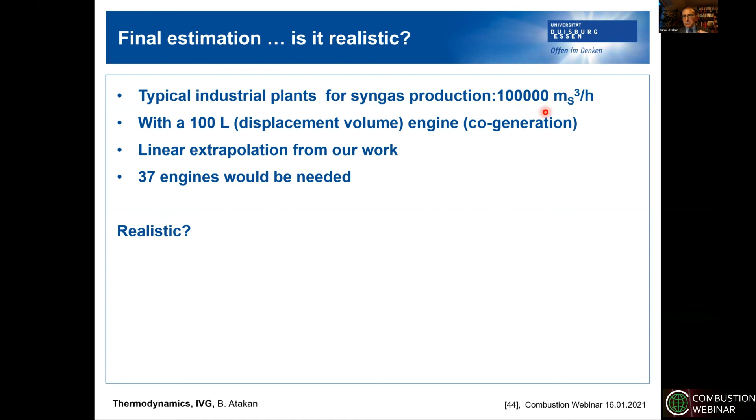So is this realistic? I think it could work out. Let me conclude. I think the methods of combustion science are quite useful also for quite different energy conversion processes, for example for polygeneration, but also for energy storage or dry reforming, for example of carbon dioxide, as it's done by Olaf Deutschmann and co-workers.

What's important from my point of view is one should always also evaluate the exergy flows and not only look at the amount of conversion of species, because you get a much deeper understanding and a better assessment of such processes. One should also go for the economics, even if we are not too familiar with this. And what we didn't start yet, but what's also important, I think, is looking at things like life cycle assessment. These shouldn't be neglected. But I think at the end, engines for polygeneration have several advantages.

One question is asking about the effect of lubricating oils on the products. Have you considered such effect?

To be honest, no. I think we are using normal engines with a normal lubricant oil inside, but we didn't really investigate it, so I can't tell you. It seems to work fine with normal lubricant oils, but I can't say if they're really important for conversion. The reason I ask is this reactor is different from a common reactor because you have the engine and piston moving around with the lubricating oil, which can be different from a regular flow reactor.

Yes, this is correct. But at the end, the lubricant will mainly be at the walls, which are at relatively low temperatures, so the chemistry should mainly take place further away from the walls. I don't expect a very important influence on the reactions, because we don't see much low temperature chemistry, and often we end up with 5 to 10% unreacted reactants due to the cold regions near the wall where we don't have conversion at the end. So I don't think it's too important, but I can't exactly tell you.